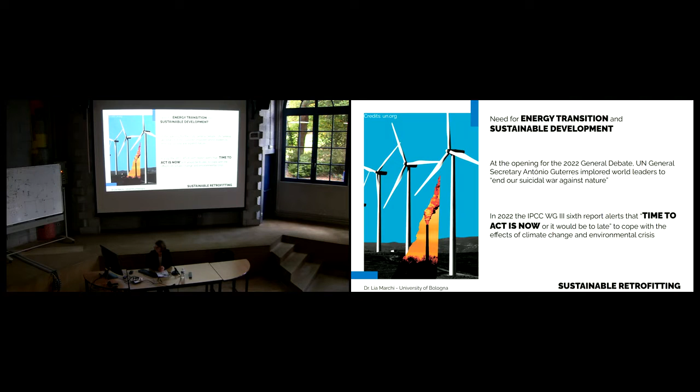So it's not just, as I said, a way of scaring people, but something that we should really embed in our way of thinking, of living, and so on. So we should basically adapt ourselves, our lifestyles, our way of producing, of working, and of living. And as architects, we pretty much have an impact on the way people live.

And so we should adapt ourselves to cope with climate change and use fewer finite resources to cope with resource depletion. But we should also adapt to ensure that the future living environment will be healthier and also more equal, more just for people, not just of today, but also of tomorrow.

And we should also adapt because we are now highly dependent, especially in Europe, on energy supplies which are not managed by us. And the war that we have next door is highlighting this point. So we also should adapt our way of living, producing and working to recover from a socioeconomic crisis that is worsening day by day. Just think that in Europe, the rate of energy poverty has been dramatically increasing in the last two or three years.

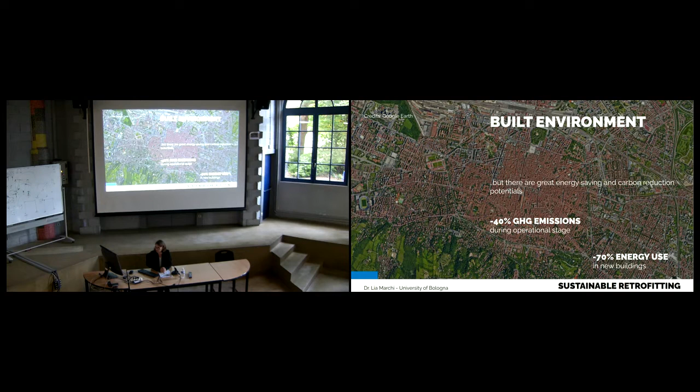But the good news, if it is news, is that yes, the built environment is among the major contributors to the impact of humans on the planet, but it's also one of the sectors where the greatest reduction potential is estimated. It is estimated, in fact, that in this sector, due to the flexibility of its demand, we can reduce greenhouse gas emissions during the operational stage of buildings by an average of 40% by means of retrofitting, as well as minus 70% of the energy used in new buildings.

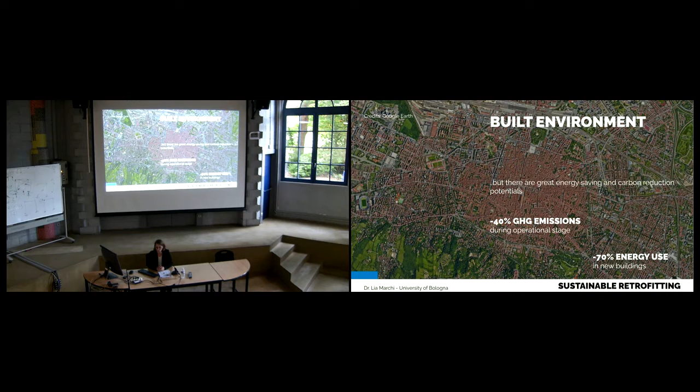When you design new highly efficient buildings, on average they consume 30% of what the same building constructed with conventional techniques would require. So it is true that constructing new highly efficient buildings is a good strategy that we can implement.

But the point is that in 50 years, it is estimated that more than 90% of our built environment will consist of buildings that are already in use today. That means it will consist of non-energy-efficient buildings. And so the real challenge is not so much to focus on new energy efficient buildings, but rather the greatest reduction potential, the greatest challenge, is in retrofitting existing buildings.

Because, as I said, the turnover of the stock is really slow. We have few highly efficient buildings constructed each year compared to the amount of buildings that we have already built in the previous decades or even centuries.

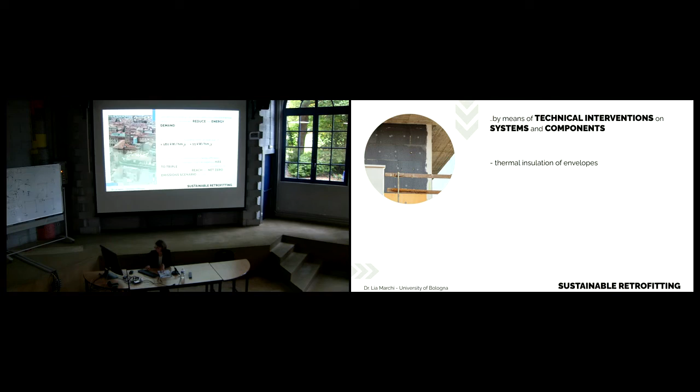And so, despite this recent investment that Europe has put in energy efficiency, the International Energy Agency estimated that the expenses in energy retrofitting still need to triple by 2030 to boost the energy retrofit rate to about 2.5% per year. Only with this path could we really reach the net zero emission scenarios that we have set globally by 2050. These figures show that we really should push on retrofitting existing buildings rather than finding new ways to reduce the energy of new buildings that are already very performative.

So how to retrofit buildings? Basically, the main strategy is to implement technical interventions on systems and components to upgrade their performance. And for sure, the thermal insulation of envelopes is among the most implemented strategies and even the most effective. But then we also very often have window replacement with new, more performing ones, and also the upgrading of heating systems and the integration with renewables.

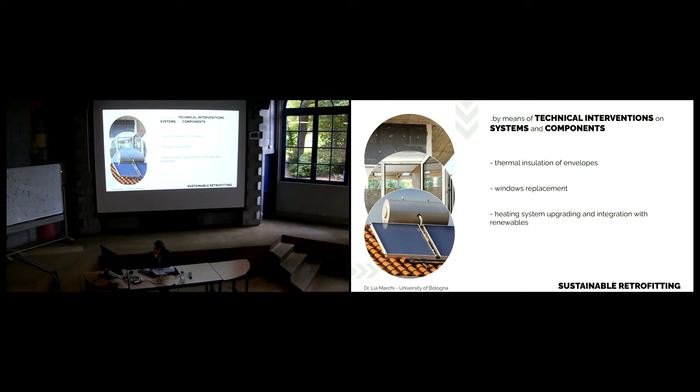But this is just a set of interventions targeted on reducing operational energy, the amount of energy required to operate a building: heating, cooling, lighting, heating water, and so on. But the point is that in order to reach very high energy efficiency rates when we retrofit buildings, we are adding materials that have required energy to be processed. So nowadays it's no longer enough to simply focus on operational energy; we should also focus on the overall balance of energy, both embodied energy in materials and components, and operational energy itself.

Even if operational energy, our main focus, represents the most important share of the energy required for a building, the ratio is usually about 90% for the first and 10% for embodied energy on average. And so as buildings get more and more energy efficient, the relative weight of embodied energy increases, because operational energy is decreasing and the other one assumes more relevance.

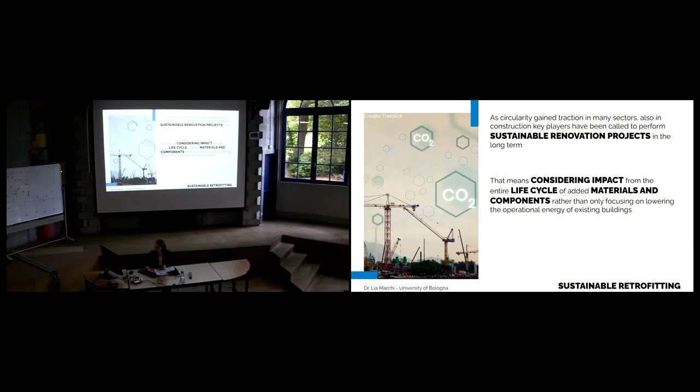So as an architect, you can greatly contribute. For sure, you can significantly influence the early stage of the building life cycle: choosing materials and components, and designing buildings that operate effectively. But another important role we have as architects is to ensure that information on design features is not lost during the passage to clients, owners, and occupants of the building. Otherwise, it's like designing a Formula One car and then giving the key to someone who is not able to drive it. It's useless, basically.

So to ensure information on design features is not lost between design and commissioning of the building, you can ensure that knowledge is transferred so that the building's circularity and sustainability potential is utilized. This is a recommendation of the Architects' Council of Europe, speculating on the European taxonomy for sustainability.

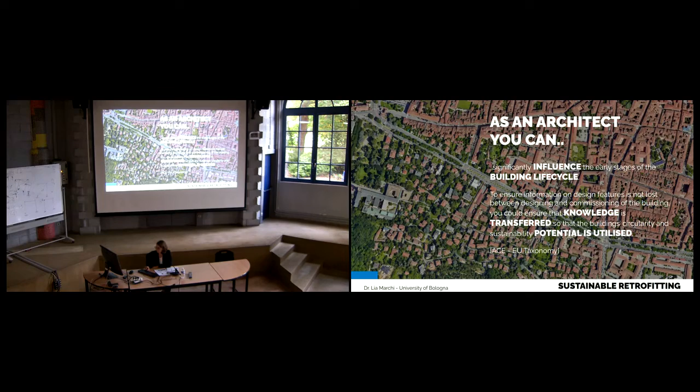And so in this sense, I would say that the 2021 Pritzker Prize winners, Anne Lacaton and Jean-Philippe Vassal, could have been forerunners of this idea of sustainable retrofitting, because their approach has always been: never demolish, never remove or replace, always add, transform, and reuse.

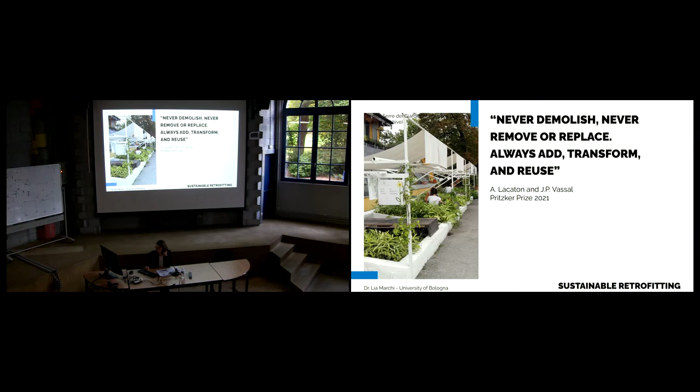So to sum up on this point, as architects, we can mitigate climate change by keeping the primary energy demand 10% below NZEB standard as much as possible. We can support circularity by designing buildings that are resource efficient, adaptable, flexible, and dismantleable. We can ensure sustainable use of water by installing water-saving appliances and water collection and so on. And we can prepare our building to adapt to climate change by designing resilient buildings according to the identified climate risk.

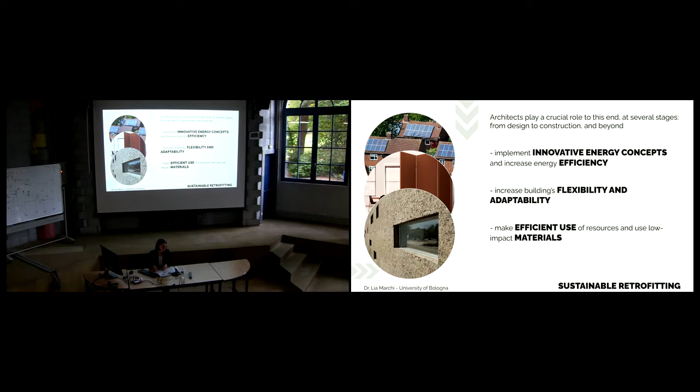You can make efficient use of resources and use low impact materials, as I assume you all well know, and so use only the amount of materials that is necessary. Reusing recycled materials, upcycling instead of downcycling materials, and obviously using bio-based materials and so on. You can choose materials and their quality for increased dismantleability. So using monomaterials is really important because you can recycle them in an easier way. But also using dry assembly without glues and foams and so on.

This is something that I added yesterday to the presentation because I was in your library and I saw this page from a local newspaper that explained very easily and in a very informative way how to reduce the energy demand of your house. This is just to say that we all are very well aware of what kind of intervention we can implement on the built environment to reduce the impact.

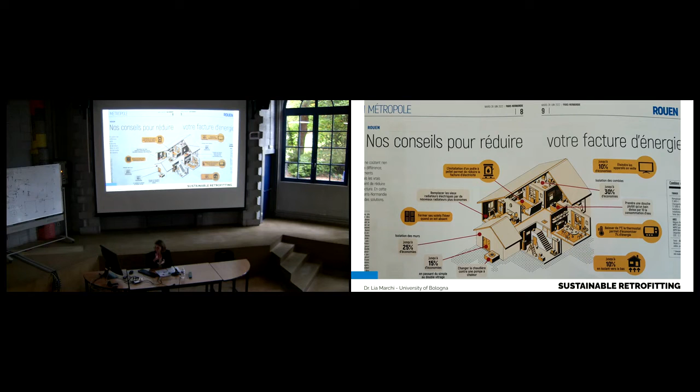But the point is that even if we know specific interventions, for example, installation of a heat pump or installation of solar panels or whatever, and we can quite easily associate this kind of intervention to a specific number, a reduction in the bill of the house and also in the energy demand of the house, despite this, we very often fail in performing a very effective project because we don't know how to consider all the interacting aspects together.

And by just focusing on specific things time by time, we usually miss some important synergy among the aspects of our building. And we risk failing to benefit from synergies that would benefit the overall balance, the overall quality of the project itself. And these difficulties that we have in approaching a renovation project deal with very different aspects, from environmental implications, where we have to consider water management, energy efficiency, indoor air quality, and so on. So different aspects that also use different indicators.

But also we have to think of the social implications of the renovation. For example, especially in buildings that have cultural and historic value, this is a very important part of the evaluation process behind design. Then we can have technical difficulties in performing specific interventions. We can have logistic issues. For example, where can the occupants of the building go while the intervention takes place? And also financial constraints. What is the budget of our client? What is also the time availability that he or she has to perform the intervention?

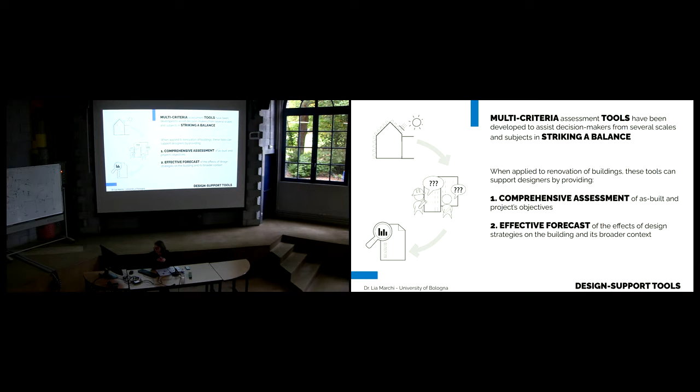But when applied to renovation in particular, these kind of tools can support designers on two sides. On the first, they can provide designers a comprehensive assessment of as-built, because they have a structured procedure for the assessment of as-built. And on this basis, the design team can also quite easily set the project's objective before starting the design stage. And also, this kind of tool can provide an effective forecast of effects of design strategies on the buildings, and not just on the buildings, as we will see, but also on the broader context, so on the nearby area.

These kind of tools, in my view, are very important for architects, at least to know, because they really can support the design team in assessing performances of the building through structured methodology, which consists in a procedure for the analysis of different evaluation categories related with different aspects. So, just to give you some preview, evaluation categories refer, for example, to water, to energy, to sustainability of the site, and so on. And then each evaluation category usually includes some credits or criteria to evaluate by means of quantitative or qualitative indicators to measure the impact.

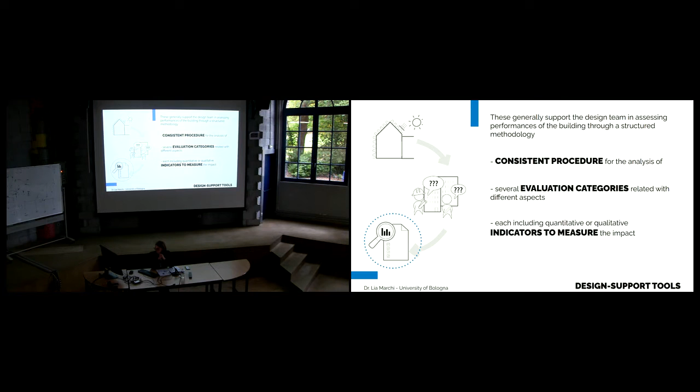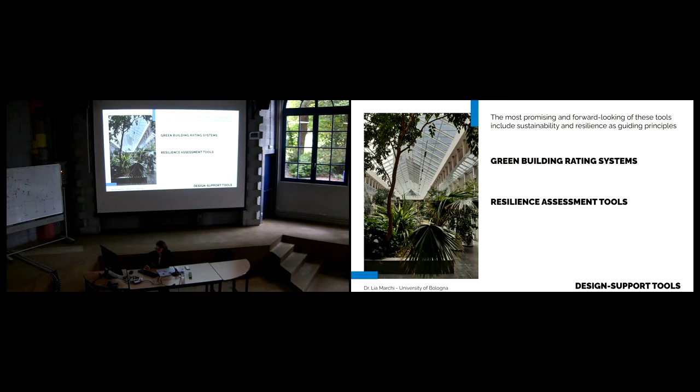And among these multi-criteria assessment tools that we have nowadays, I think that the most promising and forward-looking are those that include sustainability and resilience as guiding principles, for the reason that I said in the opening of this presentation. And the two families of these tools that I'm presenting you today are Green Building Rating System, GBRS, and resilience assessment tools. In both cases, their primary aim is basically to certify the level of sustainability or the level of resilience of a building, which is the objective, the scope for which they were developed.

But the point is that in my view, they are really important, because they can offer several other benefits for architects, for engineers, for design team in general terms. So not only certifying that a building meets specific environmental requirements or standards, but also acting as a design support tool to analyze and manage complexity, and on this basis selecting more conscious and integrated design actions.

Also, these kind of tools are very useful in communicating with the market, with your clients, because very often your clients are not technicians, and so find some difficulties in understanding what is energy efficiency, what is water efficiency, and so on. So these tools use a very informative and simple way of communicating the level of sustainability to the market, usually by means of stars from 1 to 5, or medals with gold or bronze or platinum and so on.

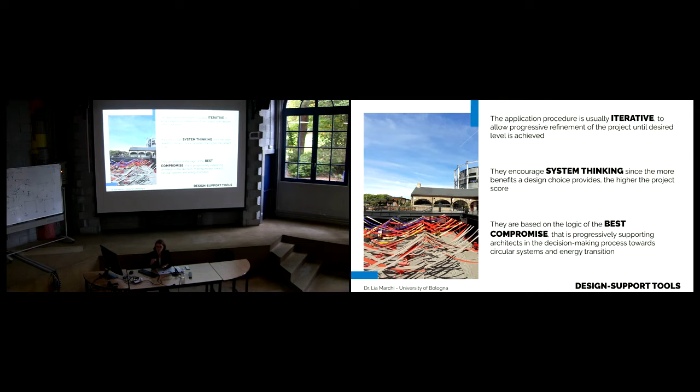These tools are also based on the logic of the best compromise. That means that you are not required to perform super well in each credit category. You can perform very well on energy efficiency and not on water management because of the constraints of your existing building, but you can still get a high level of sustainability or resilience.

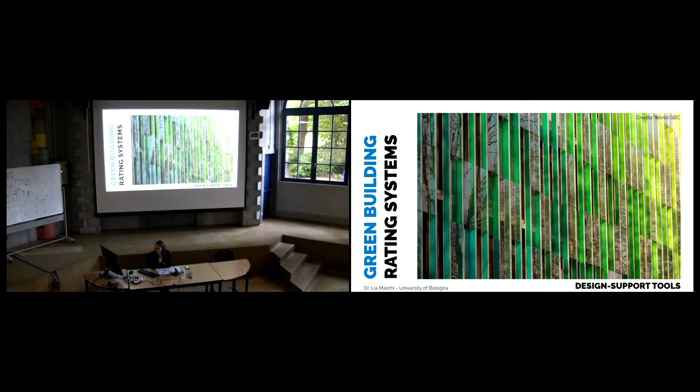So green building rating systems are the first family of tools that I'm introducing. They were developed about 30 years ago to measure sustainability. As sustainability was gaining traction as a concept since the late 80s, we felt the need to also measure sustainability in a very objective way. The first of these tools was BREEAM, launched in the United Kingdom in 1990, and then very soon the others followed in a very limited range of time.

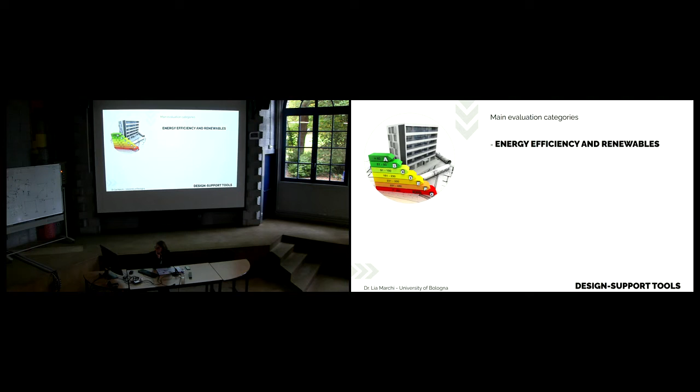These tools are applicable to buildings, but also to neighborhoods, so they are valid for different scales, and also for new construction or different types of renovations. The main evaluation categories of green building rating systems are energy efficiency and renewables, water management, conscious use of materials and waste, quality of open space, and user comfort. So it's not just a matter of energy efficiency, but something that deals with very different aspects of sustainability in a building.

So the first is BREEAM, which was launched, as I said, in 1990. BREEAM comes from Building Research Establishment Environmental Assessment Method. So you can see from the name that it is not focused just on energy, but on environmental impacts. It was developed first in the United Kingdom, but it is well diffused all over the world nowadays.

It has several applications: new buildings, interiors, renovations, and neighborhoods can be certified, and it covers different life cycle phases, in the sense that you can certify your building in the design stage, but also during construction, handover and close out, and also buildings that are already in use.

And BREEAM offers schemes to certify buildings, sites, and neighborhoods, so different scales. And the levels of sustainability that you can achieve through BREEAM are these six: acceptable, pass, good, very good, excellent, outstanding. That consists in an association with stars. So outstanding, the maximum level that you can achieve in BREEAM, is associated with six stars, while acceptable is just one star. That is, as I mentioned before, a way of communicating to the market of the construction sector the level of sustainability in a very easy to grasp way.

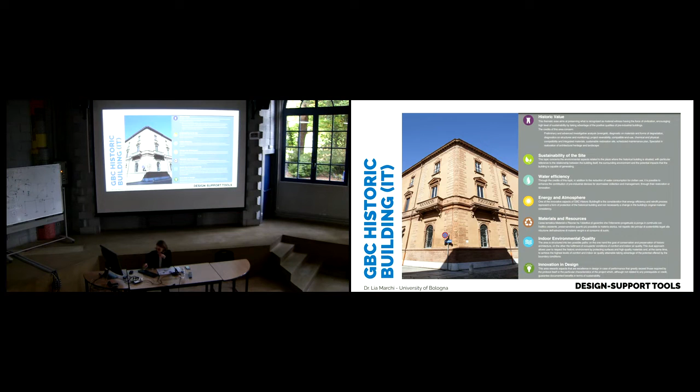Then we have the other family of tools, which is the resilience assessment tools. I assume that you have been taught about resilience, so I'm not focusing too much on that. But for about 10 years this concept of resilience has been diffusing, which is somehow complementary and somehow contrasting with sustainability. It deals with the idea that a resilient infrastructure or a resilient building should keep providing essential services due to its ability of withstanding, adapting, and recovering positively from whatever shocks and stresses it may face now and in the future.

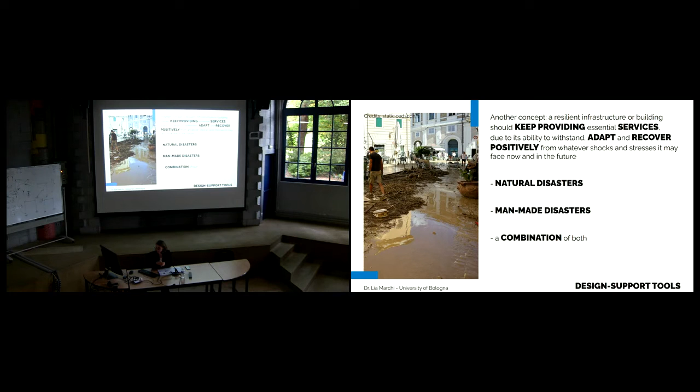While sometimes we tend to think of sustainability as less is more, or less is better, in this case resilience sometimes works with a sort of redundancy, and stresses very much durability and soundness of materials and of buildings themselves. So what kind of shocks? Natural disasters, man-made disasters, and a combination of both. But I assume that you know this concept.

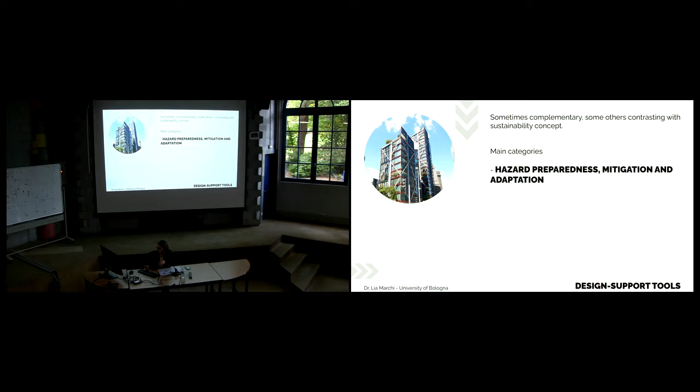The main categories that resilience rating tools evaluate are hazard preparedness, mitigation, and adaptation. I put these on the same line, but they are actually different categories because of the different kinds of indicators and strategies they relate to. Materials, durability, and efficiency. Then there is again energy efficiency, as in the sustainability rating tools, but it also stresses very much the production of energy, not just energy efficiency. And water management and collection. And also, again, users' and communities' well-being. These are the main categories of evaluation within current rating systems for resilience.

Since they are quite new, there are not so many. The most diffused is REDi, Resilience-Based Earthquake Design Initiative, which was developed first by Arup in 2013 in the United States, but nowadays is quite well diffused all over the world. The application in this case is just buildings and not neighborhoods. The types of disaster to which the evaluated building should respond are earthquake, flood, and extreme windstorms. There are different schemes of the rating tool for different types of disasters. And the levels of resilience you can achieve are silver, gold, and platinum.

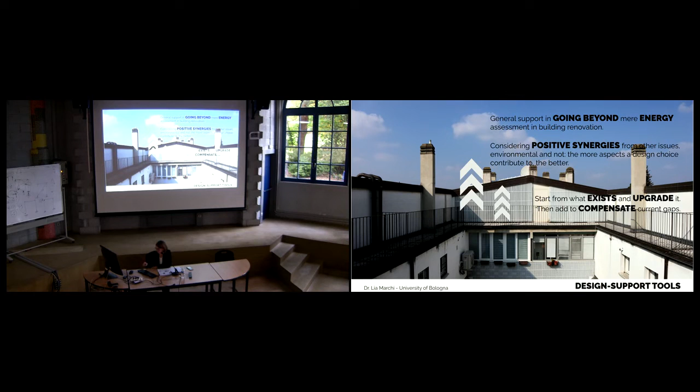They are very useful in considering positive synergies from other issues, not just environmental, not just energetic, but also social and economic aspects. The idea that the more aspects the design choice you select contributes to, the better for the project, is maybe the most important contribution of these tools to our work. So by assessing the as-built performances through these tools, we can then upgrade them, adding what is needed to compensate current gaps in their performances across the evaluation categories.

For example, we have a specific credit that assesses indoor air monitoring. Another assesses minimum outdoor airflow rate, indoor air quality management plan, both in construction and occupational stage, low-emitting materials, control of chemical sources and indoor pollutants, and thermal comfort, both in design and verification stages. From reading these credits within their specific credit cards, we can grasp very useful design strategies that help us not just focus on ventilation but also benefit other aspects of sustainability. For example, natural ventilation can be a valuable strategy not just for improving indoor environmental quality, but also to reduce energy use.

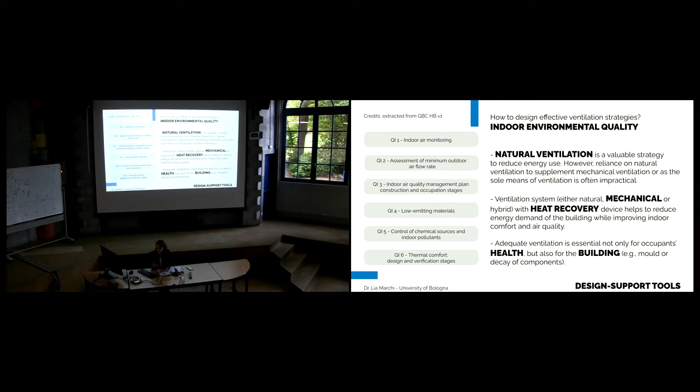And especially this idea of indoor environmental quality in schools has increased in importance very much during the last 2 or 3 years of pandemic. Since then, up to the point that many of these green building rating systems that have specific schemes for certifying the sustainability of schools have included several credits to that end.

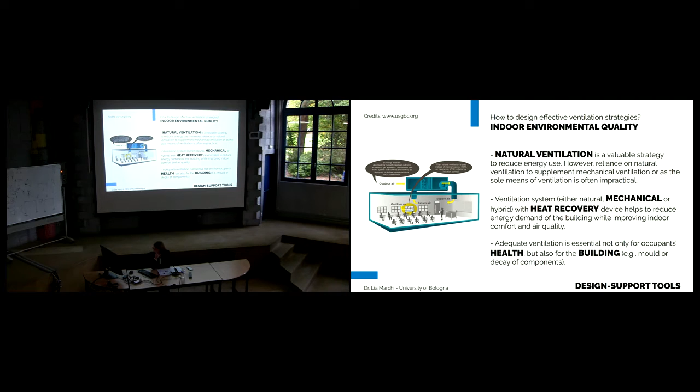Then another question that often arises when you approach renovation is how to design sustainable envelopes. So again, in the case of historic buildings, I selected from the GBC HB version 1 for historic buildings the credits that apply: energy system commissioning, optimization of energy performance, renewable energy, and advanced commissioning. From this, I grasped some, let's say, overall strategies that you can see on the slide.

So, for example, even if reaching energy efficiency in historic buildings can be very challenging and very difficult, the point is that we should, let's say, think the other way around, change our perspective, and think that it is not just a matter of increasing the energy efficiency of the building, but it's also a matter of protecting the building itself. So in this sense, if we change our perspective, energy efficiency strategies in historic building rehabilitation can probably be implemented more easily. So improving the energy efficiency of the building as much as possible, and as much as it is in line with the usage patterns of different users.

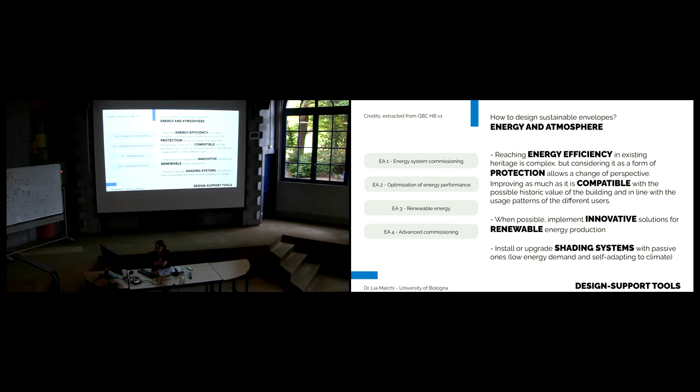And then the last question that I tried to answer is how to use materials effectively. Again, I illustrate the list of credits from GBC HB version 1 that are related with materials and resources. So we have building reuse, which allows to retain existing technical elements and finishes. We have management of demolition and construction waste. We have reuse of materials, environmental optimization of products, materials extracted, processed, and produced within a limited distance.

So, for example, reusing materials on site as much as possible in a renovation project can be performed if you have some, let's say, tools to evaluate the residual performances of materials, functional performances, residual value also in terms of aesthetic and technical value of that material or that component. And in this way, reusing materials on site or from other construction, you can contribute to save tons of new materials and resources, and so also minimize the generation of new waste for the construction sector.

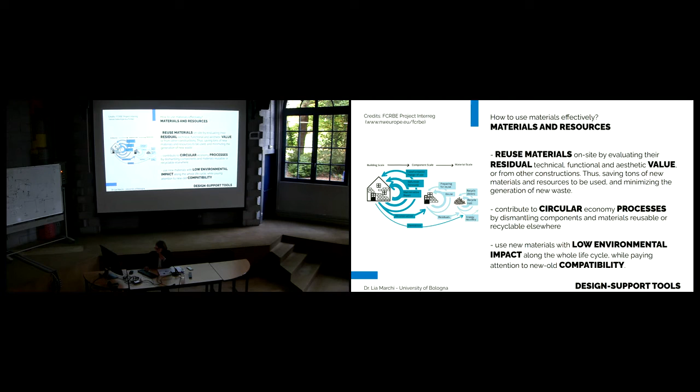I've illustrated these tools, these green building rating systems and rating assessment tools, in general terms, obviously. These tools for me are really important because they offer designers and architects a structured way of approaching the design. And also very important because they are open and in continuous development, so they follow the new needs of the construction sector itself.

And for this reason, when I was doing my PhD, I decided to make an attempt to enhance one of these tools, and use it for supporting designers and architects in designing new factories or renovating existing factories in a sustainable way, in a way that was environmentally sustainable, but also compatible with the landscape, integrated with the landscape.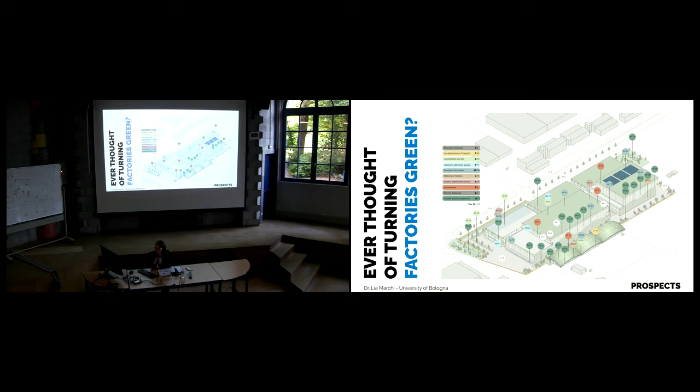So since these tools are open to change, I made this proposal for integrating LEED version Building Design and Construction with new specific indicators to measure the perceptual aesthetic interferences of factories, green factories, exploiting positive synergies among environmental and visual aesthetic aspects in factory design. So basically, I tried to add a new impact category beyond the ones that you have already seen in LEED: the perceptual aesthetic aspect, that is the last one.

And I developed 8 new evaluation credits that were meant to assess how much a building, a factory, was sympathetic, integrated with the surroundings, with the scene. These are just 3 of them: one is morphological harmonization of the building, another is chromatic harmonization, and then I also have site receptiveness and attractiveness.